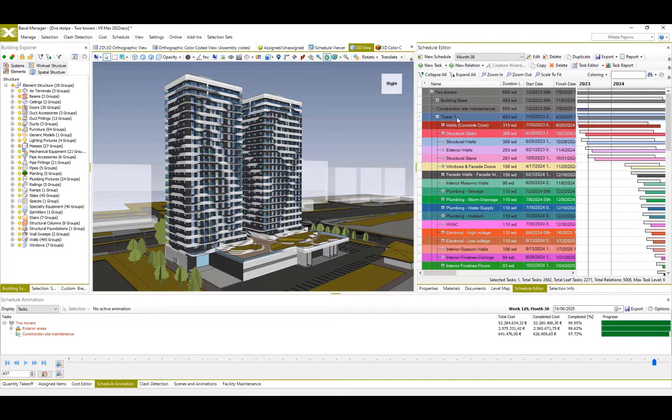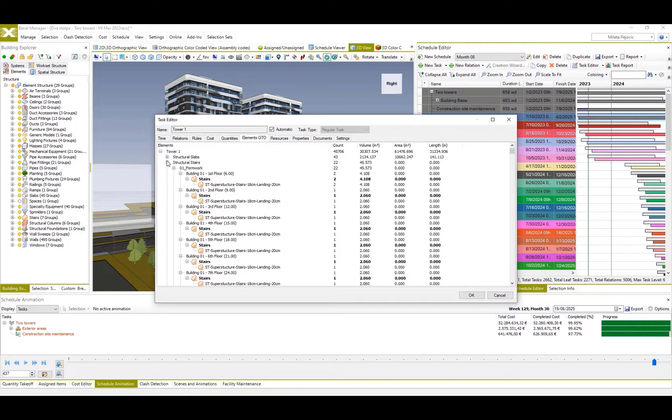This way, before the construction on the site even starts, we'll have the entire cash flow and resources information needed for proper execution. And by accessing scheduled task information, we can check the entire cost for all cost items and activities. The same goes for quantities for each activity and the number of BIM elements related to the task. You may see that these elements are organized by tasks and by entities and types.

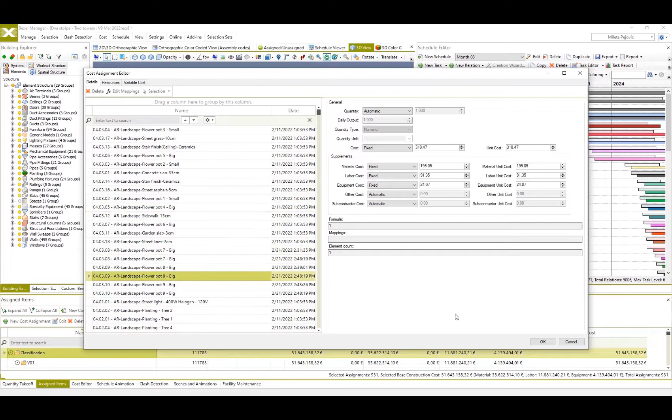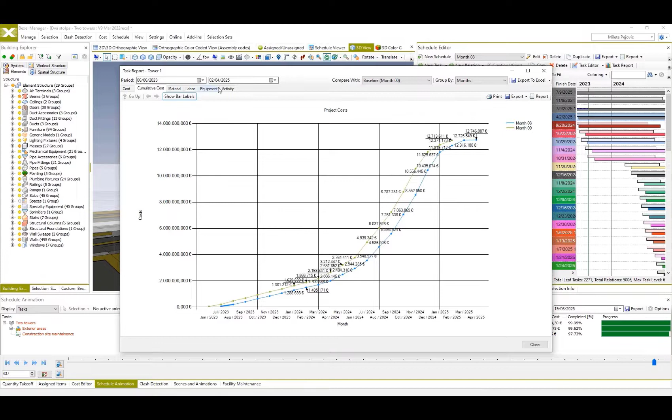Since everything is, as I've said, integrated, respective cost databases or bills of quantities can also be reviewed, even very deeply, so you can go through details and quantities of each cost item in your bill of quantity. Also, any quantity takeoff available and related to the BIM model can be inspected or exported. As mentioned earlier, in an integrated environment, all data is connected, so we may analyze cash flow or S-curve of activities throughout the entire timeline of our schedule.

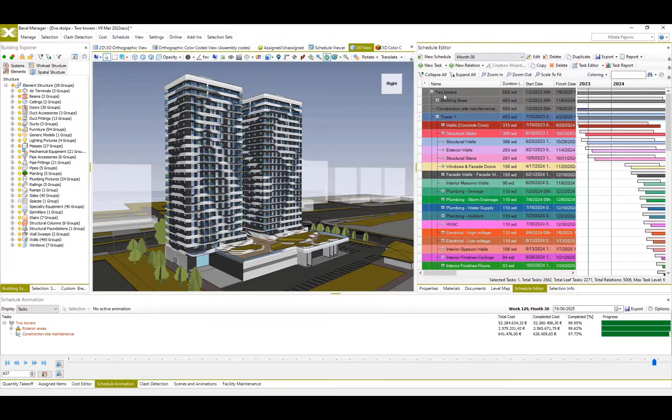All this information can be exported into various customizable reports, payment certificates, Excel files, or Power BI reports. Most of this was already presented during yesterday's presentation, and also all available information can be very easily embedded into BIM elements as added property sets, and furthermore, saved and exported within IFC files.

Here, users can even choose which added information they want to export within the IFC file.

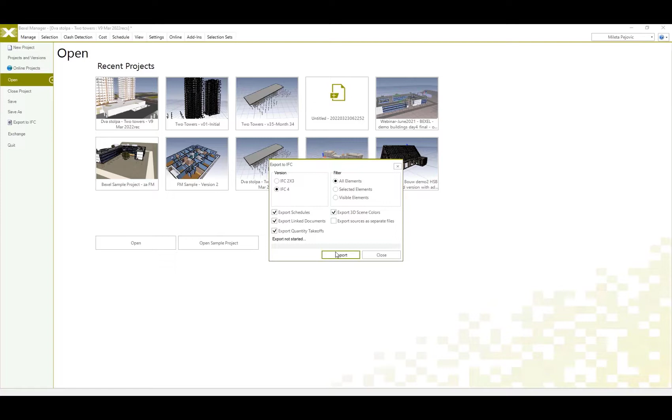Today, we'll introduce available results and analysis when construction starts and when information from the sites is being imported during the progress entries. At the very beginning, when the construction schedule is created, all construction simulations and all anticipated costs and resources information can be reviewed directly using the application, or they could be shared as videos or online reports.

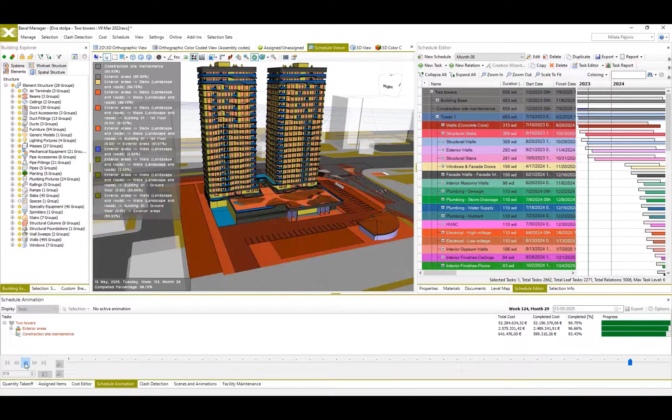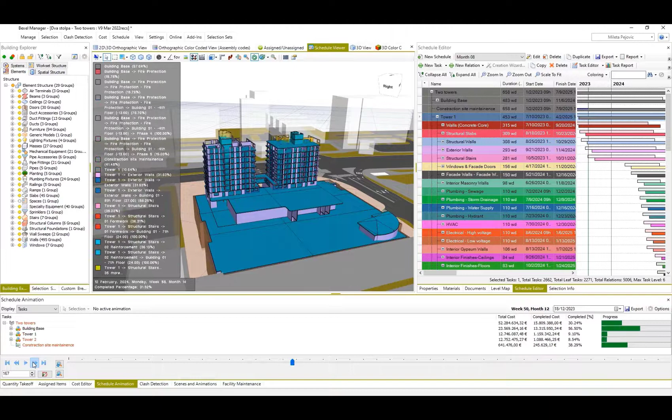Since our approach is to help on-site teams, users could very easily prepare look-ahead plans for a specific construction period. These look-ahead plans can be generated in a few ways, as a set of images on a specific date, or, for example, videos virtually presenting construction throughout the desired look-ahead timeline in any predefined interval.

So here you may see how the construction simulation is being instantly changed when the user is changing the animation interval type. So executed works can be presented on a daily, weekly, or monthly basis. By changing animation to monthly interval type, each frame shows all planned works for each month.

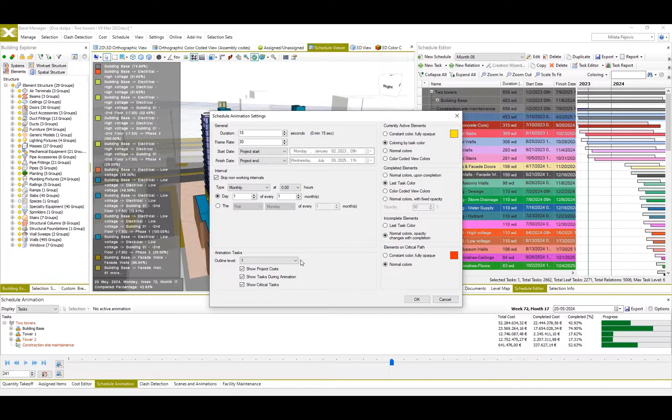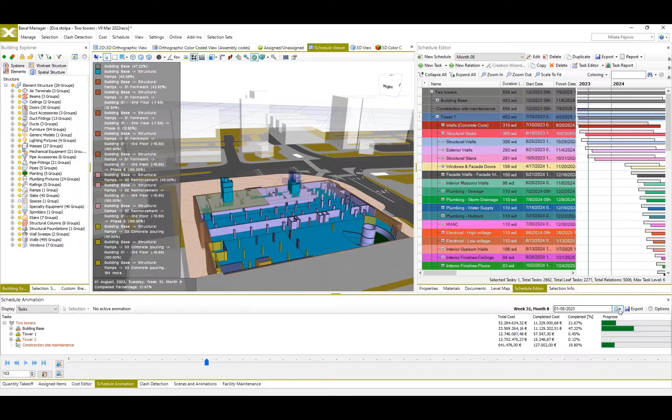So we can set a status date for our monthly progress certification and use available information from this virtual 5D BIM construction to help the on-site team. These works planned to be executed on the selected date can be organized into selection sets of elements, or to be precise, BIM elements can be grouped into selection sets according to a predefined look-ahead period.

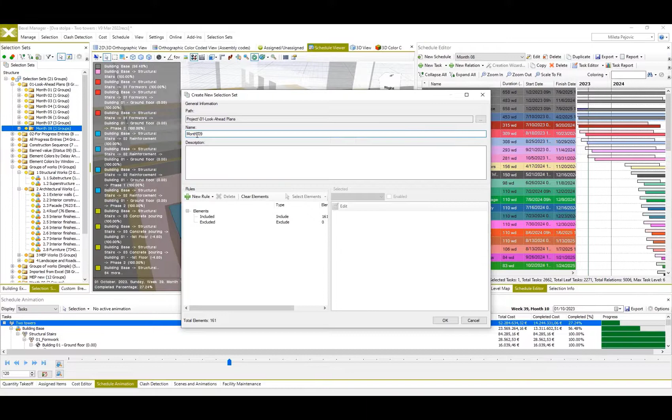So this process could be manual, by using available tools to select all elements completed and all elements planned to be constructed on the selected date, and all these groups of selected elements usually should be saved or archived in the project and organized into respective selection set groups. For example, I made a selection of elements that are planned to be constructed during the 9th month of construction on the site.

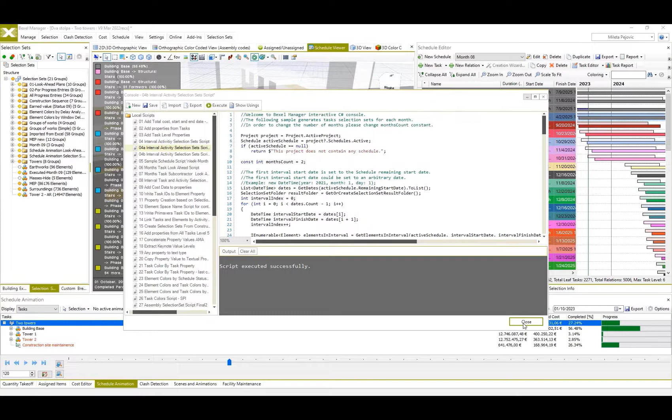So creation of these selection sets or BIM element groups can be fully automated as well, using editable open API scripts where users just easily change input data, and based on that, the system will automatically create the requested look-ahead plan groups. Once created, whether we use a manual or automated way, these groups of elements or selection sets can be saved and provided to other participants in the process.

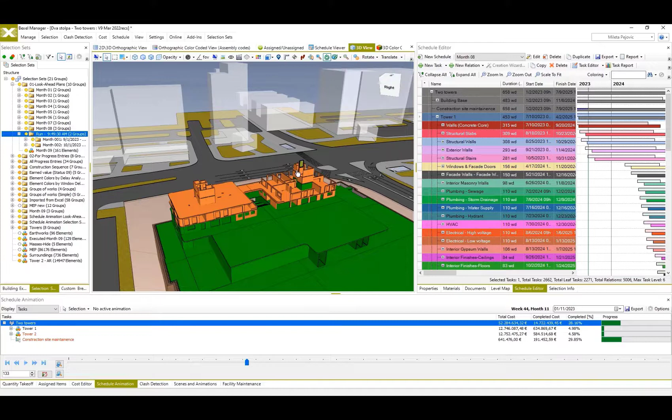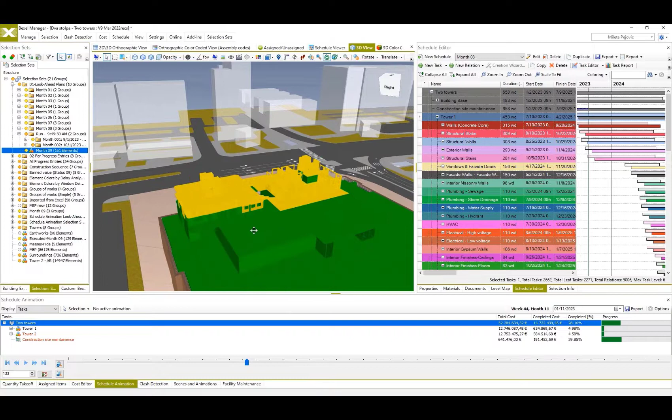So this way, everyone can easily identify and find all elements planned to be executed in a specific period. Also, the assignment of these elements to specific tasks can be found, as well as all respective metadata, including information about resources and cost. And of course, the user can have an entire list of all these planned and actually executed works saved in the project history, so they are always accessible for occasional quantity checks or reviews before certification.

All these groups can also be shared using BIM collaboration format, and this specific example has a few already created BCF entries for previous months. The first entry was created based on the initial baseline schedule, and once the progress was entered, each of the following monthly look-ahead groups was created after each monthly progress entry.

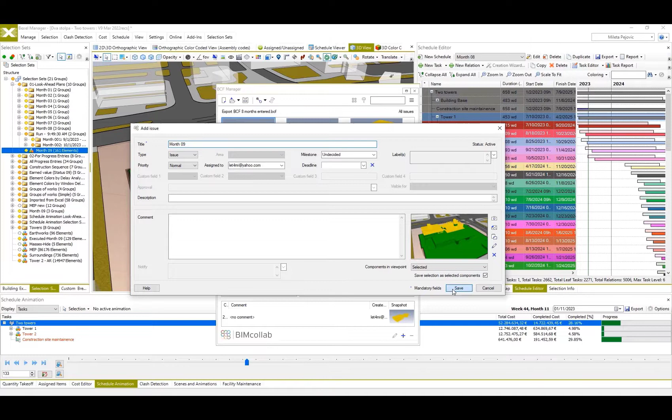And now, for example, after 8 months of construction took place, and after 8 monthly progress entries, we are currently creating a look-ahead plan for the next 9th month and saving these selection sets as a new BCF entry. These BCF files can now easily be saved and sent to an on-site team.

Once the on-site team members make a progress report in the form of BCF entries with elements that represent actually executed works, this information is sent back to the office where the progress entry is being reviewed, confirmed, and entered. Once the progress entry is added, the schedule is updated and all changes are reflected in respective cost and quantity information immediately.

One of the latest news from our company is the upcoming release of a cloud-based online viewer, which will make the previously described process simple and easy. This viewer is very responsive and has fast load times and good overall performance. And even if you're using it on mobile devices, you'll be very satisfied because you'll be able to rotate and explore your large BIM projects in a very easy and responsive way.

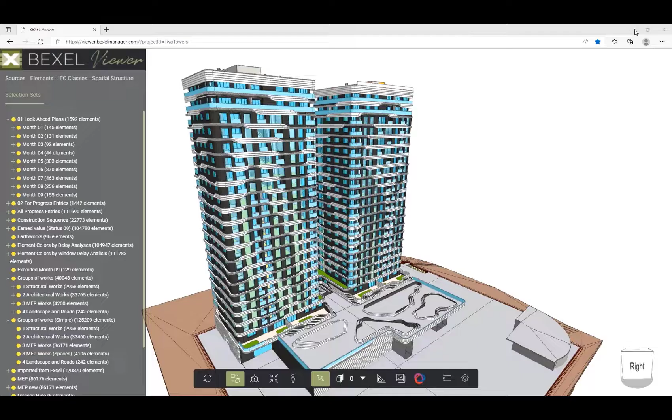The interface of this online viewer is interactive and very customizable, and in the future we expect even further integration with the Bexel Manager platform. Using our cloud-based online viewer, site managers or subcontractors can easily review the entire project. They can load in provided BCF files containing previously saved look-ahead plans, and they can use this information and element groups as a guideline for construction works which they're supposed to check and manage.

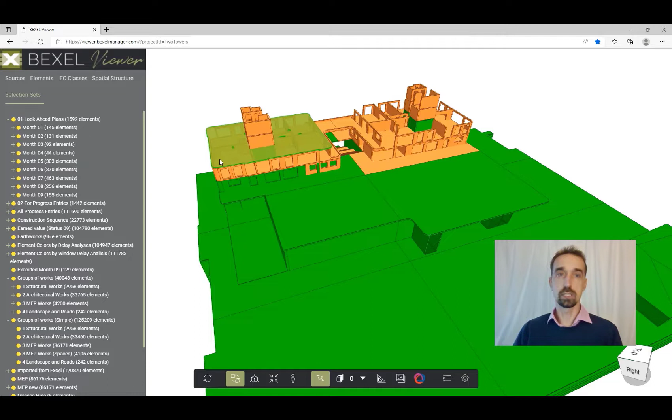Element groups can also be exchanged directly from Bexel Manager in the process of project publishing to an online storage, but the use of BCF files gives even more freedom and flexibility to all participants who maybe use some other online viewers or different online applications for BIM collaboration. So they can also be able to exchange this latest information and use it.

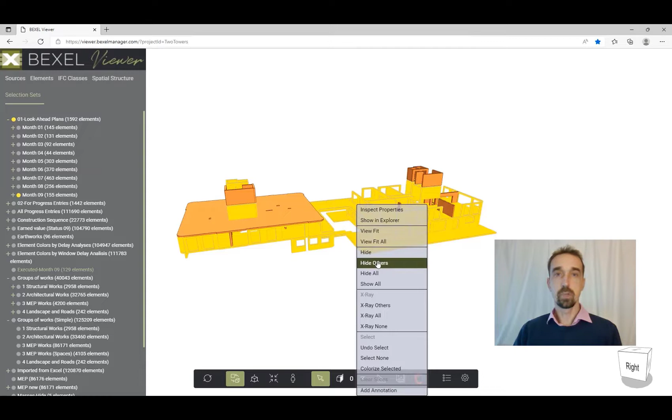Once construction activities are executed on site, our site team can update provided selection sets just simply by marking or selecting actually executed elements on site. And all other elements which are not executed can be hidden. All of this can be done even on mobile devices such as tablets or even mobile phones.

So these element groups can be tagged using the annotation tool, and once the selection set containing executed elements is updated, the site team can save it again as a BCF file of completed works and send it back to the project managers or office teams for revision and final certification.

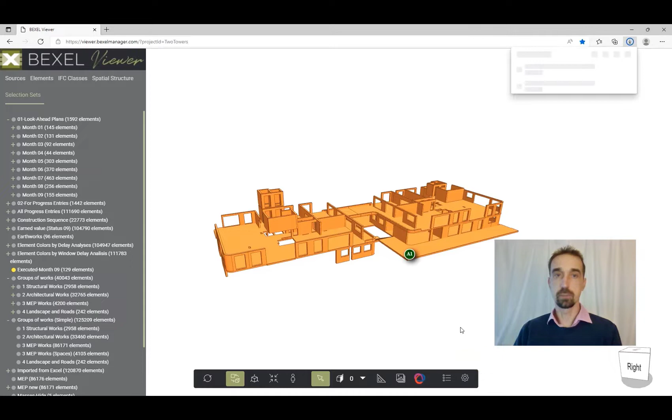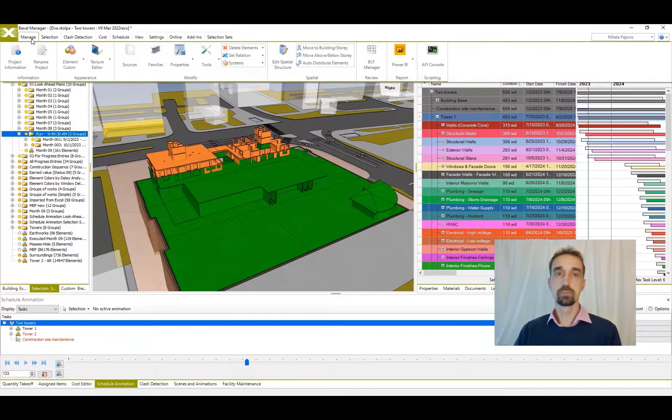Using an online viewer, the on-site team can also review these planned works in the form of simplified look-ahead animations until the specified status date. In this case, all executed works are colored in green, while planned works for the 9th month of execution are colored in orange. The process of progress entry from received information from our site team is very simple and straightforward.

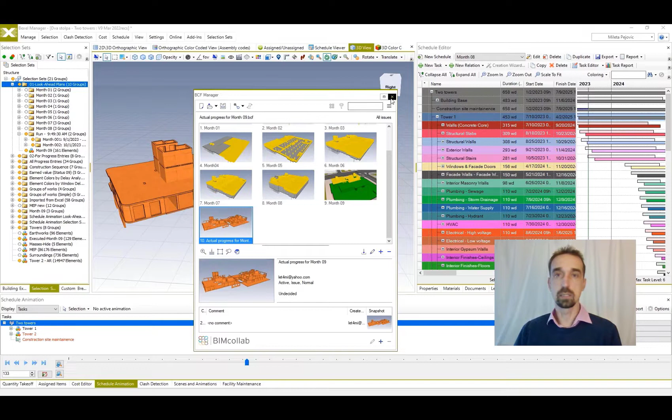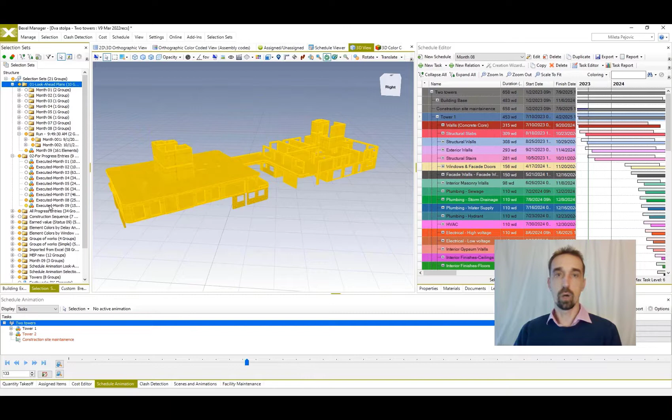A loaded BCF file contains executed elements, so we can use it and organize it according to our needs. These elements can be easily reviewed, and it's always good practice to save these elements as a group. In this way, a manager creates an archive of all previously executed works for each progress entry. In our case, it's monthly progress entry, and we'll save this group of elements so everyone can track the history of all planned and actual progress of work during the entire construction.

Also, another good practice for progress entries and schedule updates is keeping a backup of the current schedule or a copy of the previous one. By doing so, a management and planning team can make advanced analysis of multiple schedule versions against the baseline or against any other schedule version during the execution process.

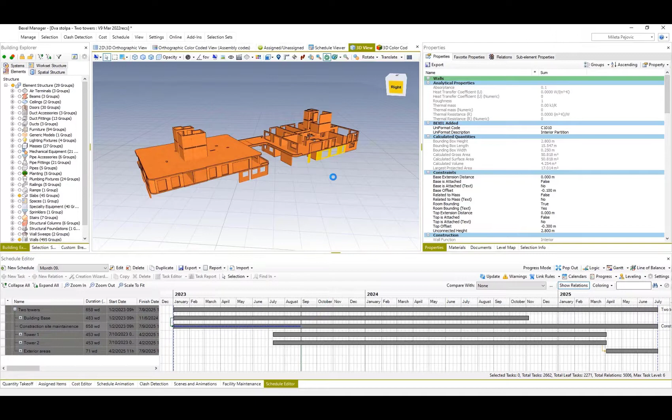For updating the actual schedule and entering progress information received from site, the easiest way is to use our intelligent progress entry editor. This progress entry editor makes the process easier since a user can specify a time frame for the latest progress entry and simply load in the previously saved selection set, that group of elements provided from the on-site team. Based on selected BIM elements from the group, our engine recognizes all tasks and activities in which these elements are supposed to be executed in that marked time range.

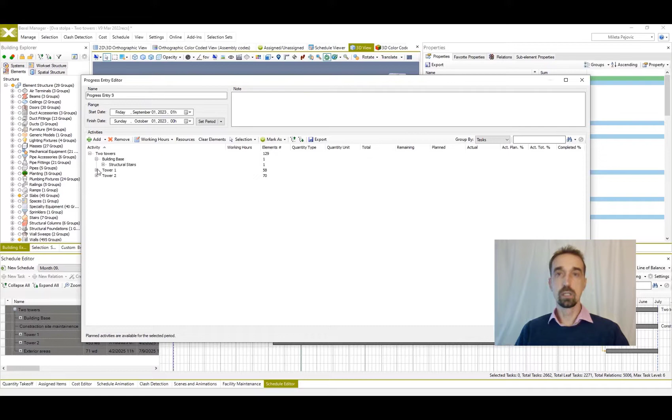Based on quantities of these selected elements, the system also calculates and populates actually executed quantities for each task. During this process, a user can always switch between different view modes, one to review activities for the previous period and the other one to review all tasks. And no matter what view you select, all respective information will be shown accordingly.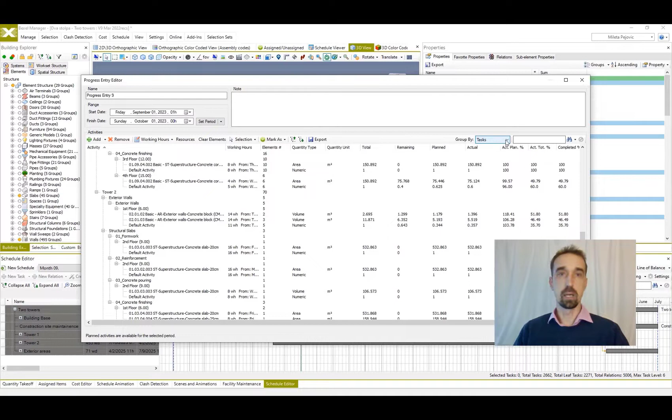This gives more time to managers to additionally review and confirm if these tasks, quantities, and percentages are reflecting the real picture from the site. And after consultation with on-site supervisors, these values can be approved or changed before final approval of finally executed works.

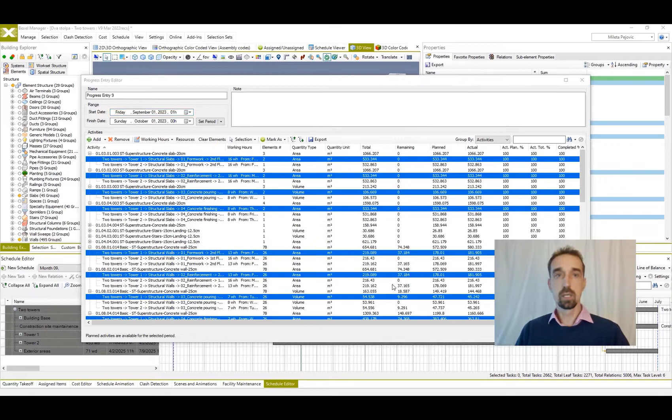Also, if project managers have information from contractors or subcontractors about the resources used for the execution of each activity or task, this information can also be populated and adjusted according to real use on site. By changing resource quantities, the system will recalculate actual cost and all respective information and performance indicators such as, for example, earned value, cost variance, cost and schedule performance index, and similar.

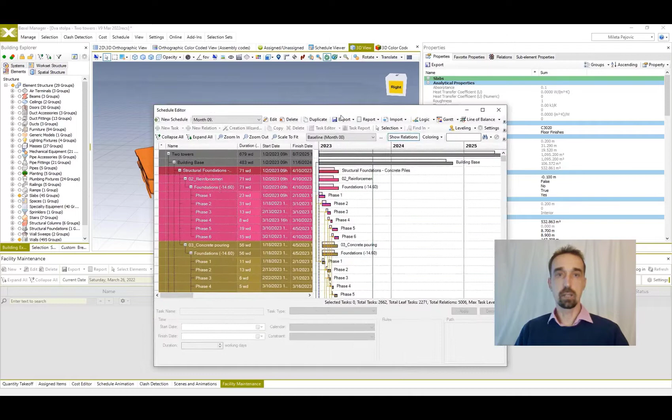When the progress entry is made by marking the last entry date, it's now very easy to compare actual and baseline schedules. I will just pop up the window so we can analyze some of this available information in full screen. We can check the current line of balance and see if specific activities or works are impacted by the latest schedule updates and progress entries.

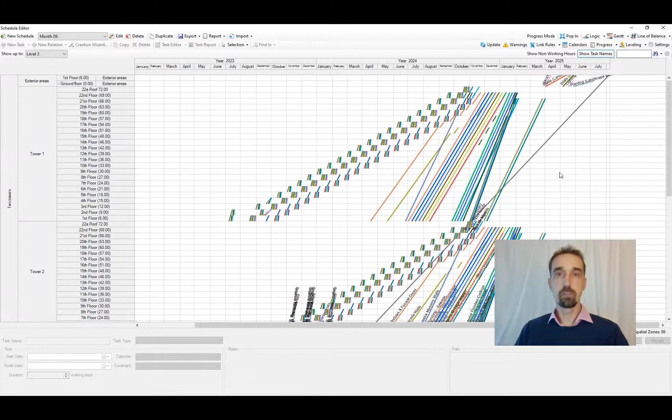But more importantly, all key performance indicators such as baseline and actual cost, cost variance, earned value, cost and schedule performance index give us real information about how the project is performing against the budget and how close it is to being completed compared to the schedule. All these KPIs are instantly updated for each task after each progress entry. This way, participants on the project can analyze all relevant information directly in Bexel Manager.

Additionally, we can see this cost and resource information in the form of cash flow charts and S-curves compared between actual and baseline schedules. We can also see activities for the entire planned period of construction.

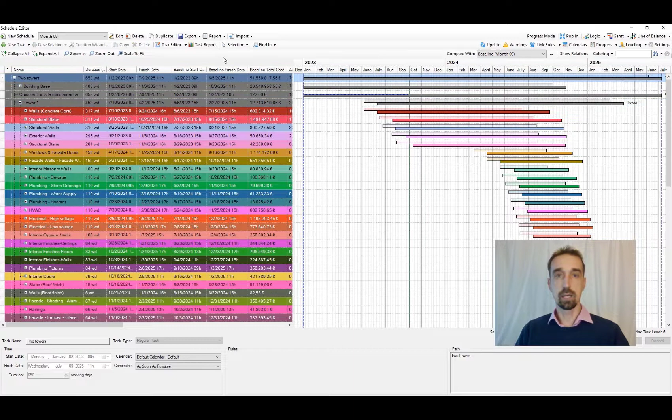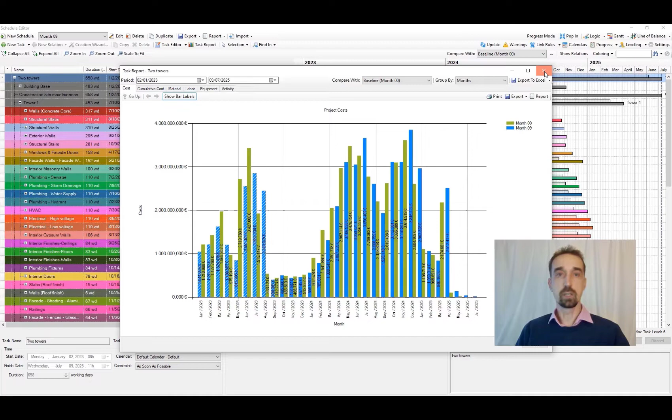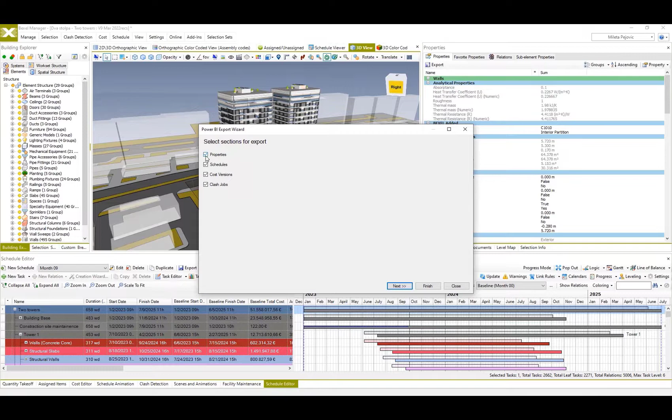There are a few ways for information exchange. One of them is exporting Power BI reports into customizable Power BI templates, providing all previously seen information and KPIs in a more interesting and more organized graphical way. Here you may see one of the possible Power BI templates, and this one is available by default for all users of our application. Information is organized into multiple sheets, each of them for a specific type of analysis and KPIs.

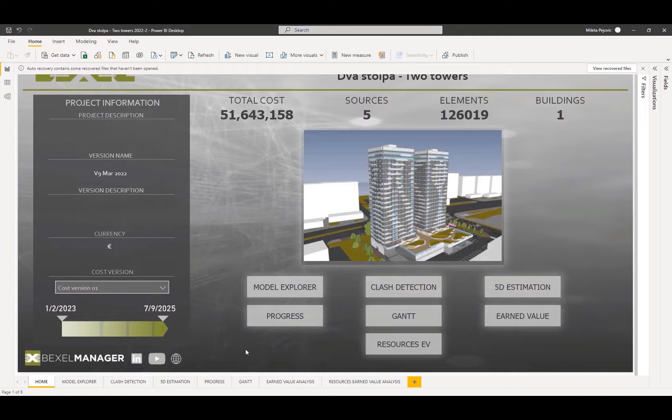Here you may find the common project information and baseline cost information. On the other sheet, there is cost estimation available according to the used cost classification of the project. Works are organized into groups, and you may see how the price is being divided between these work groups. We can also find current progress information, in our case for the 9th month of executed construction works.

And here again, you may find a comparison between planned and actual cost in form of a table, but also in form of cash flow and S-curve chart. The red dashed line represents the status date, or date of the last progress entry. At the bottom, we may find charts for resource cost spread between material, labor, and equipment. In case you added subcontractor costs to your cost items, this information will also be available and shown right here, and in Bexel Manager as well.

Lastly, earned value analysis, as mentioned before, gives us the real picture of performed works and expenses on the project at the moment of the last project entry. In this example, after 9 progress entries, more or less everything was executed with a small time delay compared to the baseline schedule, but you may see that the cost performance index is slightly below planned values, and at the same time the schedule performance index varies, and at this point the project is running slightly behind schedule.

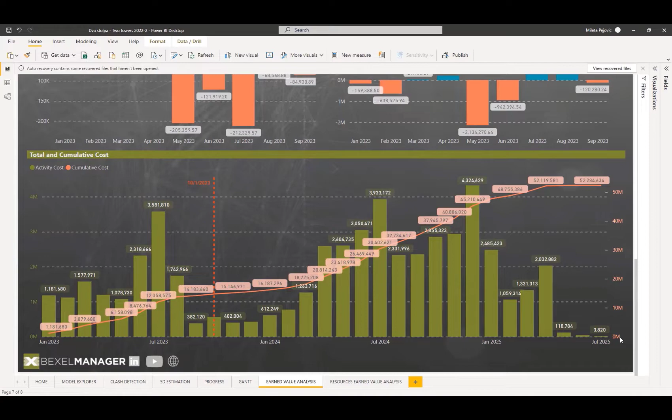The good thing is that here we have a history of all progress entries, so risk managers could analyze and anticipate potential issues on the project and save all this information as evidence if needed. In this example, we identify a notable delay during the 5th month due to extensive design changes requested by the client. That delay was later on decreased, but after 9 months of construction progress, we are still in delay caused partially by this event. By changing compared schedules, the earned value chart and all other information is updated instantly. And this is a good way to track the history of your project and project cost.

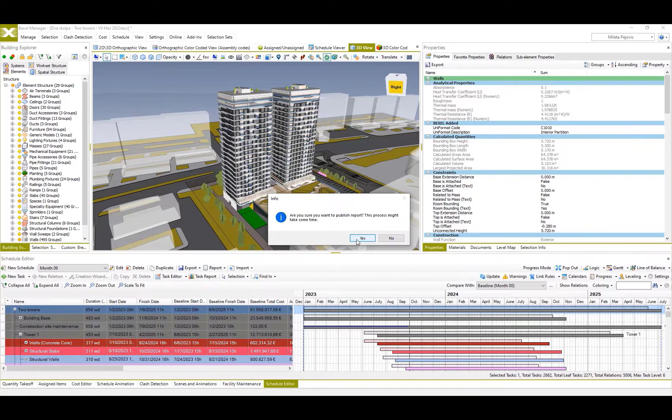Another great and new way to publish and share all this important project information is using our cloud-based portfolio manager. The initial step is to have all needed information created and to use an inbuilt publisher to send data to the cloud. We believe that this is the first truly BIM-based project management platform on a global level, and this online platform is created to collect all the BIM data from multiple projects and multiple revisions of any project. All data is saved on a cloud-based common data environment, and the entire platform is very flexible and interactive.

All published information can be stored in a database hosted on cloud, or in a database hosted on client premises. Another important thing I would like to mention is that all data can be accessed using REST API. This way, the number of possible customizations or integrations with other applications is practically unlimited, and you may create your own information exchange ecosystem. One of the most important things for all main participants in construction, such as investors, contractors, and project managers, is the possibility to have access to accurate, latest, and key information. Our cloud-based platform creates a seamless link between project participants and BIM data.

Currently, the user interface looks like this. It's quite simple and clean, but also very flexible and customizable. The Project tab enables detailed analytics for each project and its revisions. For example, we can track and analyze the number of elements per category for multiple revisions of our selected project. We could also analyze other information related to BIM elements, such as their quantities, for example, volume.

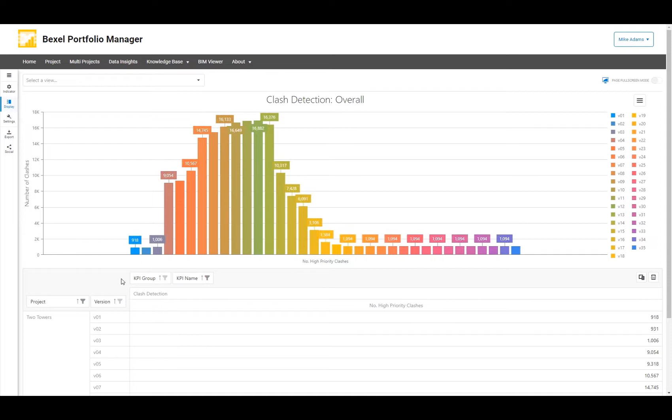Similar analysis can be done for other 3D model-based results, such as the number of clashes detected during the progressive clash detection process done in the past period. So here you can track how the number of clashes was changing during different project stages and in different model revisions throughout time. This specific one shows us the process of resolving high priority clashes in the last 35 project revisions. These results can be changed to low priority clashes or any other clash status created during the clash detection process.

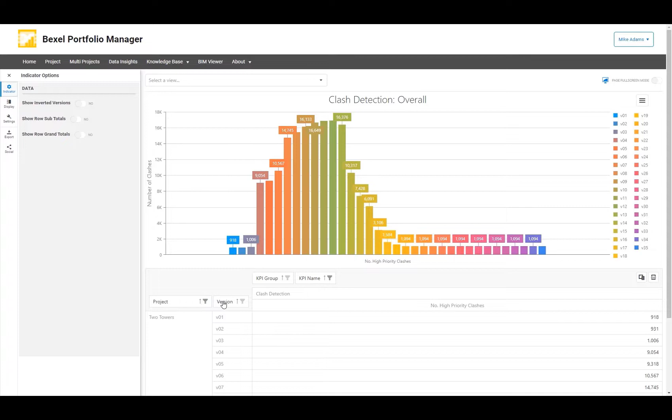As before, any presented chart can be visually adjusted in different ways, but more importantly, the data presented can also be rearranged and reorganized in different ways to create the most suitable style for your reports.

One of the most important performance indicators in construction is earned value. So here you may see just a part of the available information for earned value analysis on the currently active project. This example shows earned value, planned value, and cost variance at completion presented for each progress entry date during more than 30 months of progress entries. Relevant cost information can be reviewed from the chart or from the table directly.

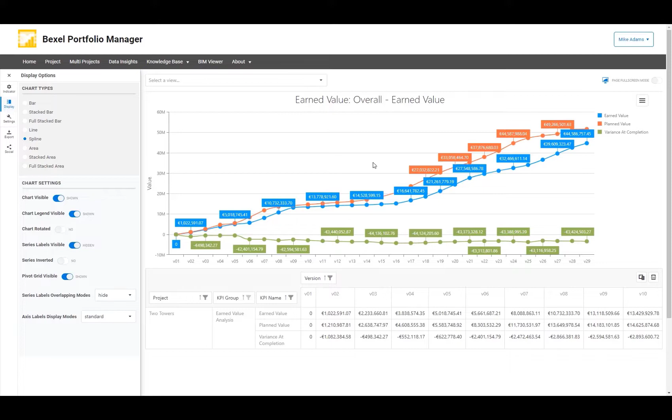As previously, the visual style of these charts can be changed, or we can narrow down the range of these analyses to different revisions of a project using, for example, filtering options, and simply by selecting the project revision that we want to analyze. More available information related to earned value on the project are the cost performance index and schedule performance index. So using analysis related to these performance indicators, it's very easy to track the production history of your project and also to anticipate and plan mitigation activities if needed, of course.

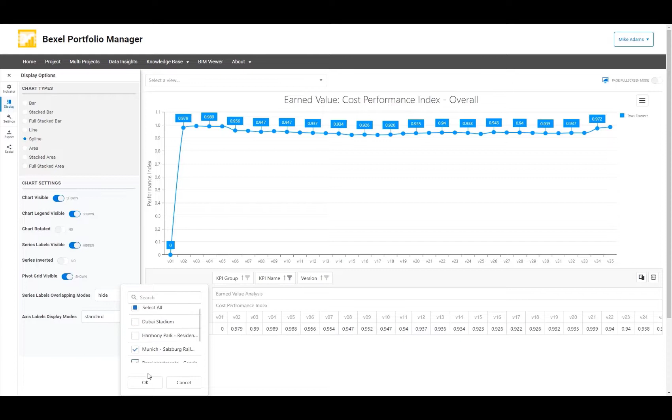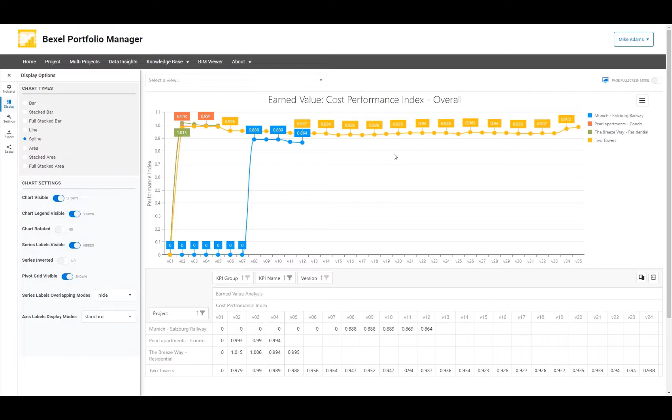An extremely useful and informative analysis available in Portfolio Manager is a set of different delay analyses extracted from the BIM project data. One of them is, for example, excusable delay analysis. Risk managers can easily identify when excusable or non-excusable delay took place and what is the length of these delays, so they could track the impact of these delays on the total delay of the project. Again, as mentioned earlier, each analysis can be exported directly into Excel files if needed.

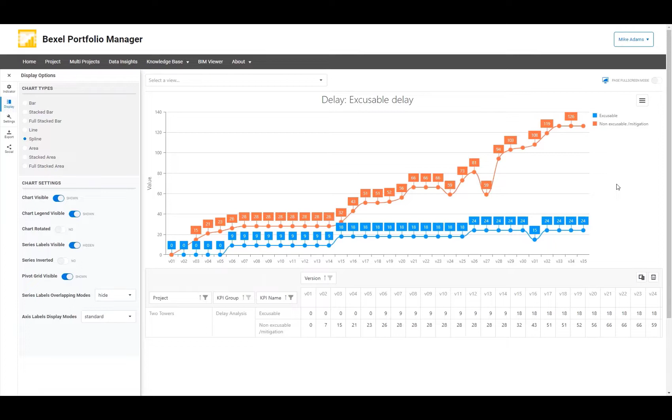When delays are related to cost information, we can have a more detailed understanding of possible risks and the reflection of each delay on the entire project. One such delay analysis is total value of impacted remaining tasks, where the manager can identify when each delay occurred and what was the impact of this delay on the price of remaining tasks. These values can be seen in a chart or in a table tracking the history of each project entry.

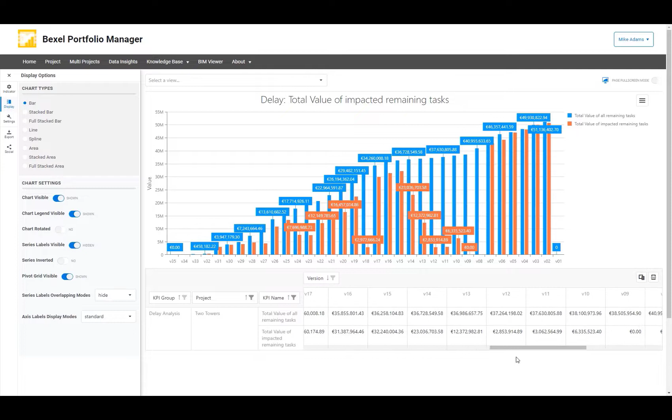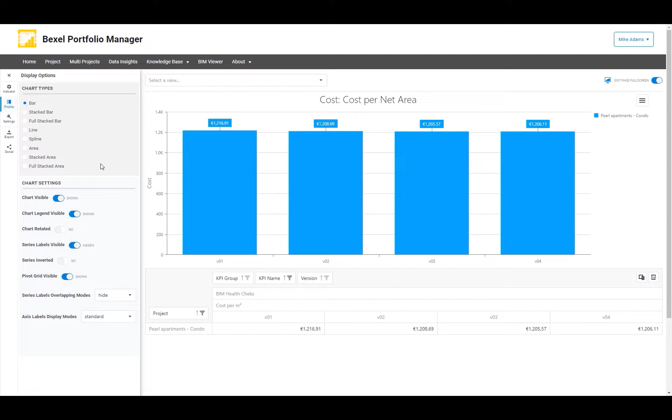Another interesting analytic related to cost is showing project cost per net area calculated for each project revision. The same information also can be compared for different projects, so we can analyze what is the project cost per square meter or square foot on a few different projects executed in different locations. And again, we can change these graphs to present available information in the best way.

We could also use different analytics, for example, to show cost calculated directly from BIM and cost added from other cost items which are not related to our BIM model. Because when it comes to cost estimation, even projects created with a very high LOD or LOI don't have sufficient information, so we could fully rely only on a model. We can easily check the same information from some other projects, since all raw data from all different uploaded BIM projects are stored and available to be interactively reviewed right here.

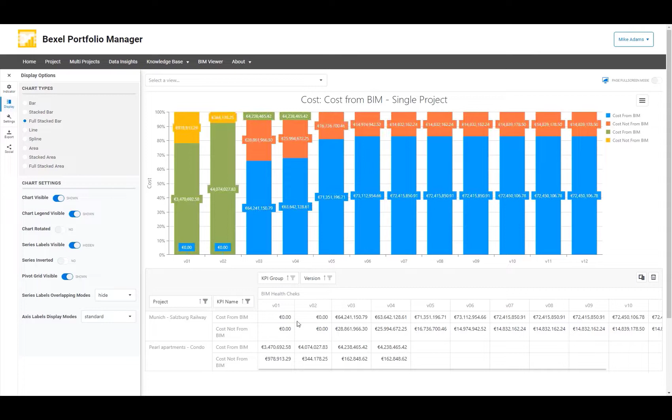You may see that data insights of our portfolio manager are currently being finalized, and this will enable detailed analytics per data domain. In practice, it means that, for example, a user can analyze the quantity of concrete or any available resource used in all projects in one place or in all projects in one country, or compare quantities between different projects in different countries as well, because all the data is published and available in our cloud-based platform.

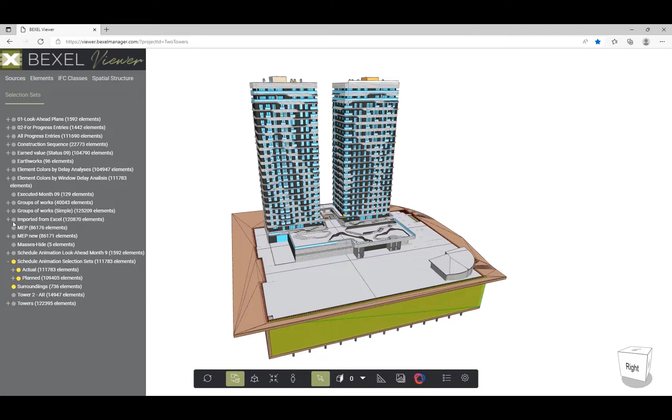Bexel has an agnostic approach, so various model viewers can be also integrated into Portfolio Manager and therefore be fully independent of any commercial platform. This means that you'll be able to review your 3D elements or 3D models using various internet browsers and data stored on your premises without compromising your other information.

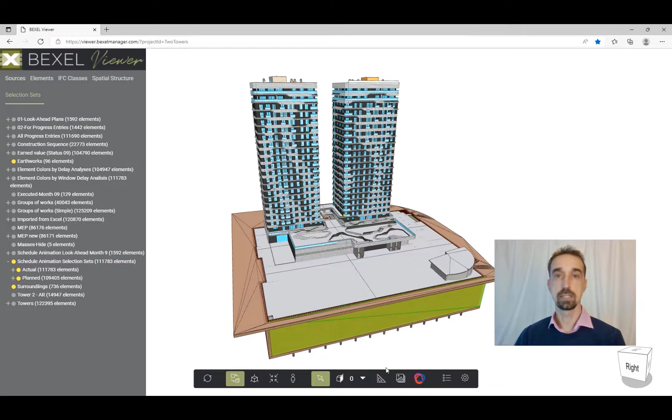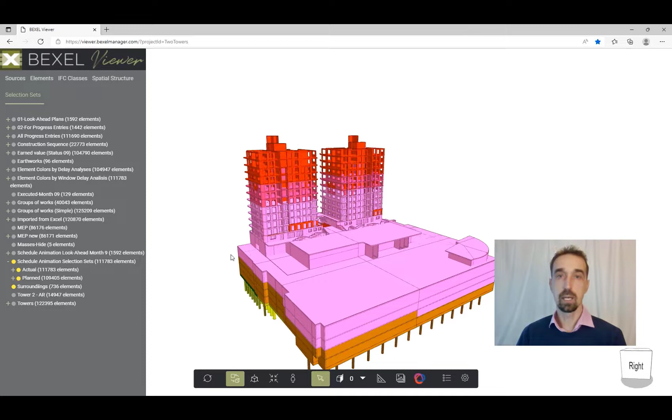In our current BIM viewer, as you saw, we integrated the element grouping into selection sets, for example, for easier model review process, and a great way to use results of different cost and schedule analysis is using color coding and schedule view video options. So user could, for example, review the construction simulation of respective project when elements are color-coded based on delay analysis. In this video, green elements are executed on time, while other elements are colored in shades of red and purple if delay is in range from, for example, 7 to 15 days, 15 to 30 days, between 30 and 60 days, 60 to 90 days, and red is for all elements which have delay more than 90 days.

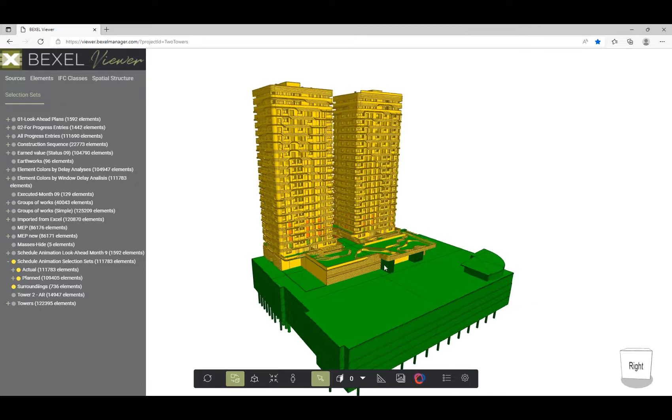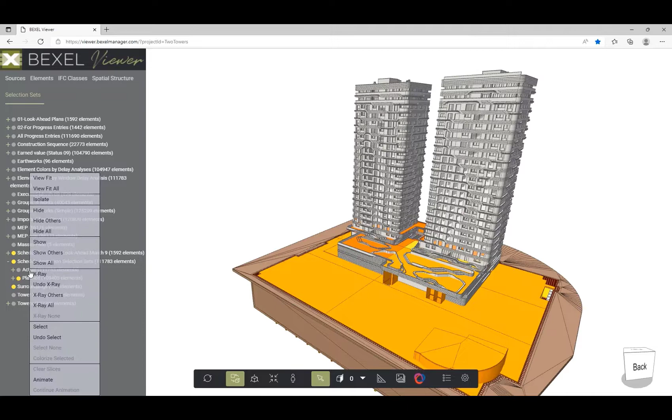The other useful example of using an online model viewer for progress tracking is a model review where elements executed on time are colored in green and all works in delay are colored in red. All works planned to be executed but didn't start in the moment of the latest progress entry are colored in yellow. Similar color coding can be done based on earned value analysis, where we made color variation based on earned value range, where elements and works colored in green and yellow have higher earned values, and elements colored in shades of orange have lower earned values. Elements showing gray are related to tasks that didn't start at the moment of the latest progress entry.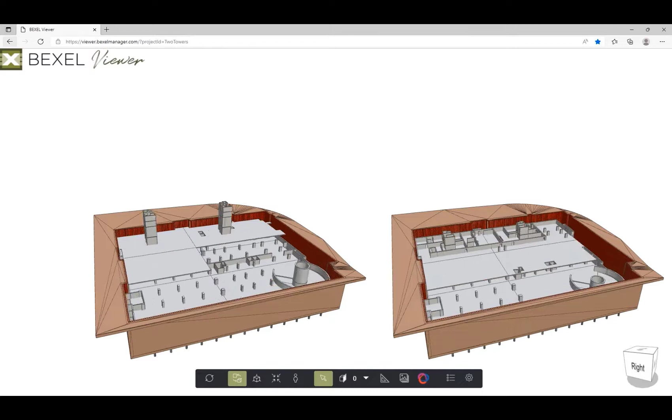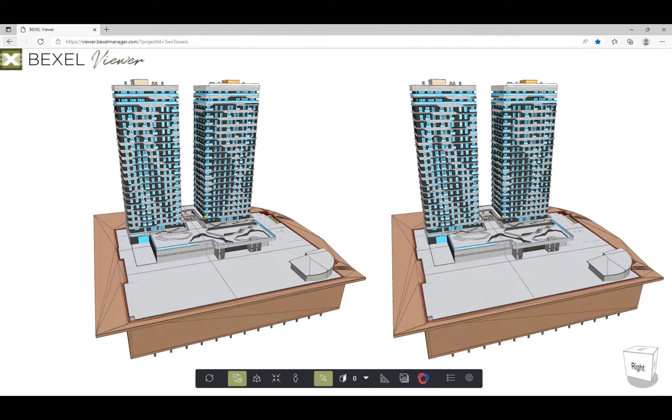In the upcoming releases, we'll enable simultaneous review of planned and actual construction simulation using an online viewer. We believe that by using online viewer, user now can visually inspect BIM projects in a very easy and interactive way, so you don't need very powerful working stations to access the latest information, and you'll be able to review models using common portable devices.

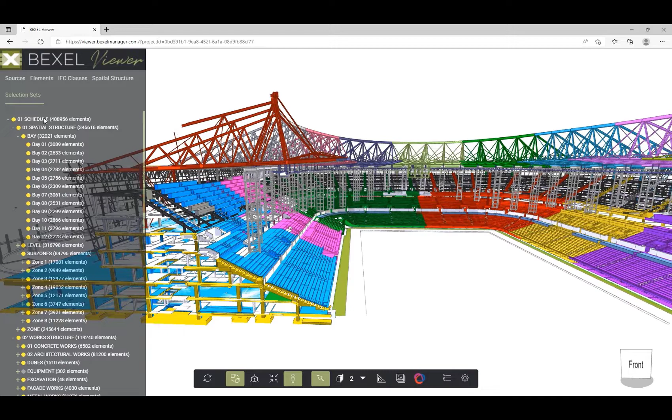These examples show you different use of online model viewers to review properties of BIM elements and to color code these elements based on property values. The stadium is color coded according to spatial zones and construction works base, while on the other hand, based on the chainage values for infrastructure project, these elements are color coded differently. The properties can also be inspected using Property Information window.

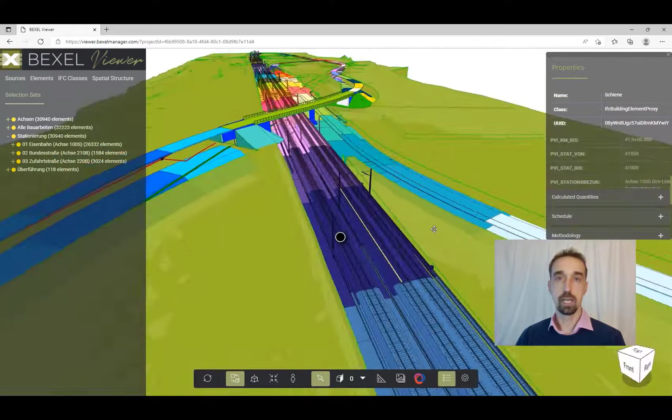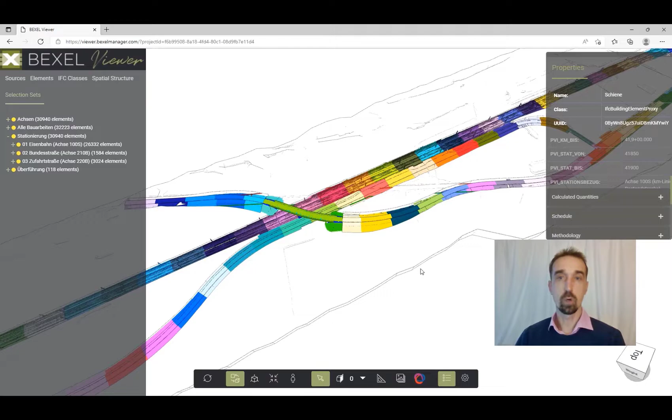The entire demonstration today is performed using just a few simple BIM projects and exported information. Also, this Portfolio Manager and Model Viewer are just initial versions of our advanced online system for BIM analysis. What is very promising is the level of available customization and the possibility to expand these online model review tools even further. This will provide much more insights and much easier access to any required information. This way, anyone with the respective credentials, using any portable device, will be able to access the latest project information, no matter the current location.

Hopefully, this gives you an idea of great horizons and almost infinite possibilities of BIM integration using cloud-based platforms. Also, just imagine how easy and fast you can access required information anywhere, anytime, and provide instant feedback visible to all relevant participants in the project. We strongly believe that this could greatly improve information exchange and information analysis processes and contribute to the evolution of workflows in construction digitalization as well.